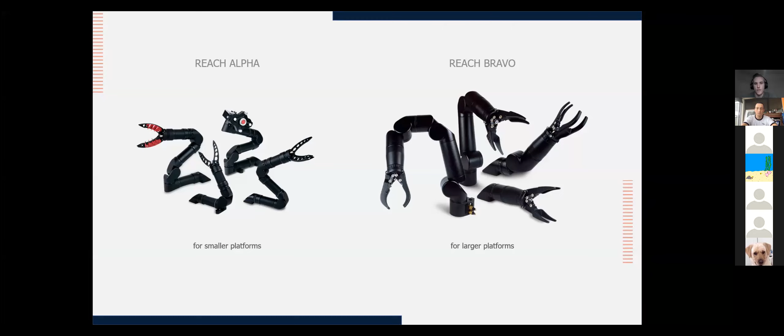This has been achieved through 2 lines of subsea manipulators: Reach Alpha, a small inspection class manipulator, and Reach Bravo, a larger light intervention class manipulator.

In 2017, Blueprint Lab released our first grabber for underwater environments. This was a dual function manipulator, the smallest in its class at the time. In 2018, the 5-function Alpha line was released, aiming to provide greater dexterity through more degrees of freedom. And to aid controlling all 5 joints simultaneously, the master arm was a natural development in the following year.

After the success of the Alpha line and requests from many stakeholders, the larger and stronger Bravo line was released in 2020. The system extended on the Reach Alpha to include extra degrees of freedom and more advanced control methods.

As the Bravo system has become more mature, we have extended towards development of vision and automation systems. These systems are still under development, however we've made some pretty good progress in recent months.

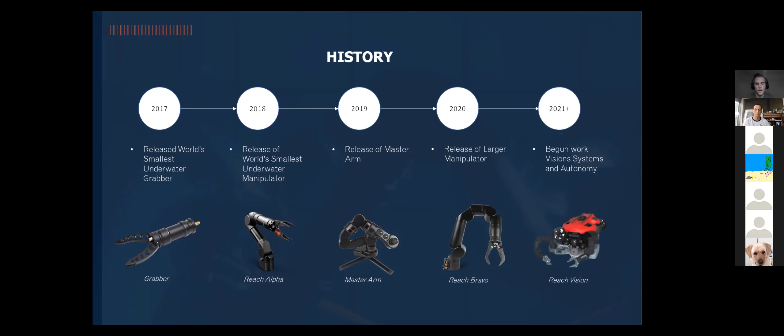To interface with the manipulators and provide feedback to the users, we also develop our own topside software and one-to-one controller. The master arm is a traditional style controller for subsea inspection and intervention tasks, and it allows the user to intuitively control the manipulator with relatively low threshold for entry.

Reach Control is our in-house topside software, and it allows users to control, configure, and communicate with the manipulators. Reach Control also enables users to view the current state of the manipulator, which could be operating at 450 meters underwater. It achieves this through feedback of the manipulator's position, velocity, current, torque outputs, along with the climate and error state of the arm.

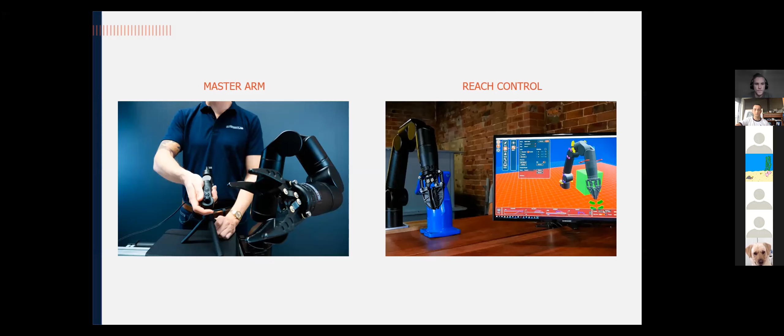Each of these components is critical to the function of the system, and if any one component is not up to scratch, then it could have a detrimental impact on the system's performance. In the worst case, it could even cause damage to expensive infrastructure or cause harm. Because of this, verification is probably one of the most important and time-consuming points, although it requires a lot of detail, so I won't labor you with that.

I am going to dive into a few other topics though. I think joint control is probably one of the first topics that any mechatronics engineer would look into when deciding to develop a manipulator.

Proportional integral controllers form the basis for much of our motor control architecture. We use a cascaded structure where each loop generates the set point for the subsequent loop. From a position demand, a velocity demand can be generated, then a current set point is produced, and then a voltage. This voltage demand is mapped to the 3 phases of a brushless DC motor by the field-oriented control algorithm. These signals are then sent to the motor, which drives towards the generated set points.

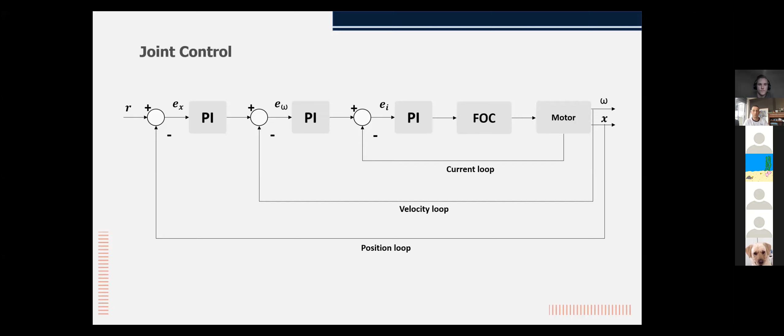As I mentioned in the previous slide, to control brushless DC motors, we need to generate 3 voltage signals. The best way to achieve this is through field-oriented control. This technique uses the Clark and Park transforms to simplify the control problem quite significantly, and it abuses Kirchhoff's current law.

By abusing Kirchhoff's current law, the Clark transformation can be used to project the 3 AC signals onto 2 stationary axes. You can see on the slide that we have the 3 AC signals there, and they are getting transformed into the 2 signals by the Clark transformation.

And then following that, these 2 AC signals are transformed into 2 DC signals, quadrature current and direct current, via the Park transformation.

With this simplified problem, it is now possible to use a basic PI controller to produce the voltage set point. The voltage is then passed through the inverse Clark and inverse Park transformations, and the 3 voltage signals are restored.

Since the quadrature current is directly related to the torque output of the motor, we can set this value via the velocity controller output, as seen on the previous slide. The direct current is then controlled to a value of 0 in regular circumstances.

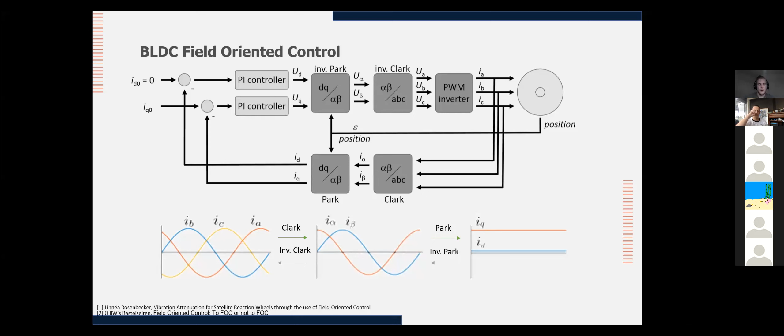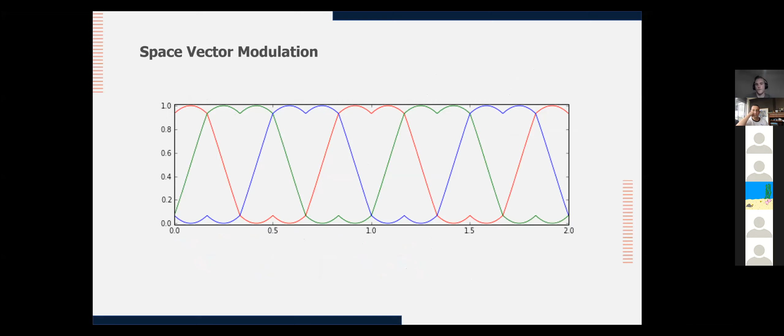Now that we have a way for controlling the joints, we must consider how to calibrate the gains of these controllers. To achieve this, we use the motor model along with the controller and sensor sample frequencies to inform how the gains are computed.

We then define the controller's bandwidth to determine how aggressive the controller will respond to a set point.

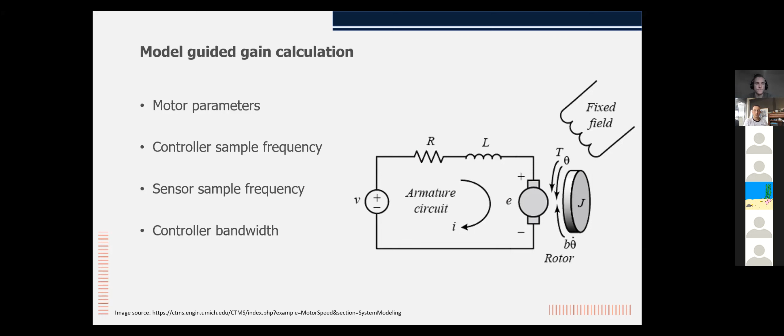Another important concept for manipulator control is kinematics. In this setting, kinematics defines the relationship between individual joints and the global frame. For example, if each joint angle of the manipulator is known and the relationship between each link is well defined, then it is possible to determine where the end effector is with respect to some reference frame.

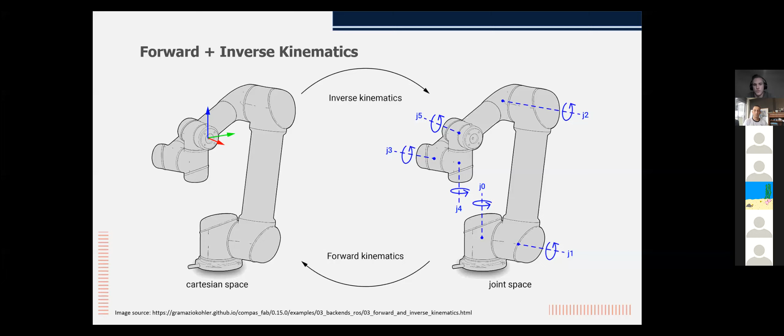It is also possible to do the inverse of this problem, where we determine a set of valid joint angles given some desired end effector position. However, one issue commonly encountered when attempting inverse kinematics is the event that multiple solutions are valid, or that no solutions exist at all. To overcome this issue, optimization-based methods are typically employed to find a solution that is close to the desired set point.

Now that we understand how to move the manipulator's end effector, we might also want to add a degree of autonomy to the process.

In the Bravo system, position presets are implemented to provide the user with stow and deploy positions. Objects are also defined in space to provide keep-out zones for the workspace.

When a user decides to use a preset position, the system will plan a path between its current and desired position.

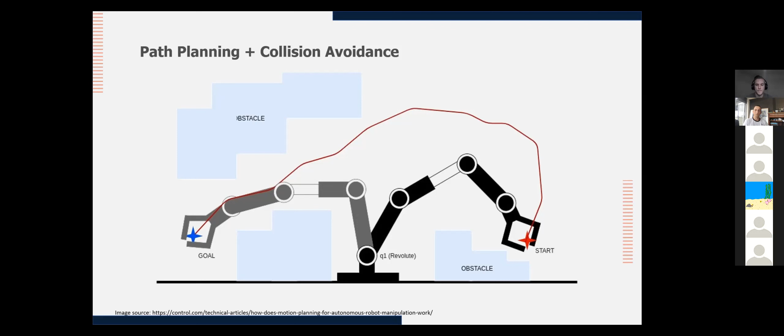So as you can see, there's a lot of moving parts that go into a system like this. I've just shown a small subset of the topics that I've worked on, but really there's a lot more that aren't even shown on the slide.

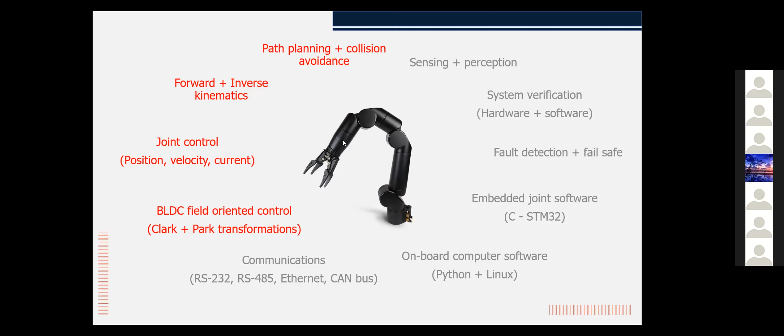So it's a little bit of both, actually. For me personally, I was employed as a software engineer, but I spend a lot of my time working on hardware, doing fault finding for electrical stuff. I do a lot of the control backend for the joints. I also do some of the control backend for the base computer, which provides kinematics, inverse kinematics, and some of those more high-level functions. I haven't done any mechanical sort of stuff yet, but if you're an engineer that has a mechanical background, there's no reason why you couldn't do software and mechanical as opposed to software and electrical.

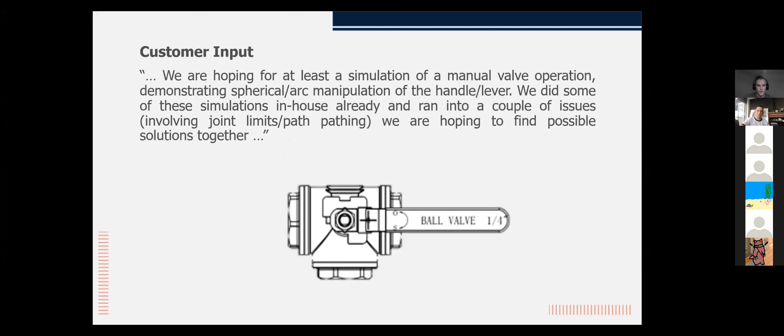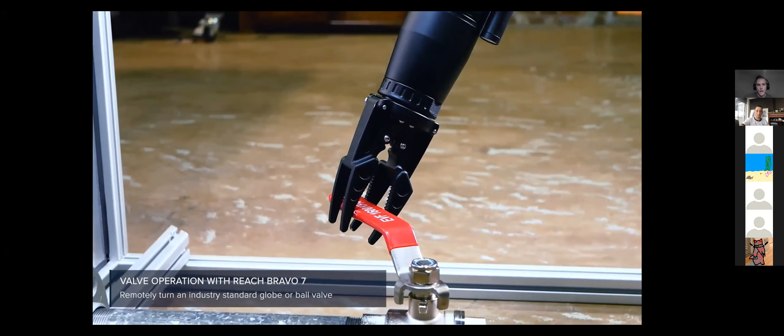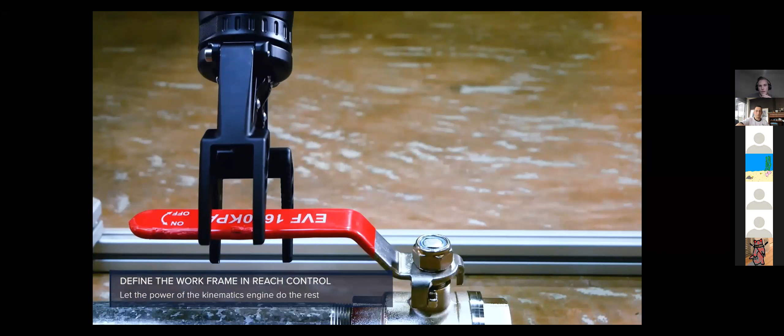Thankfully, it's actually quite easy to use software to remove this complexity. So this is one of the solutions that we came up with. The solution would allow the user to define a fixed point that the end effector would rotate around in space. And then they could simply just supply a velocity demand to rotate about this point and operate the valve.

We named this arbitrary point the work frame and developed a mode to operate around this point. In this mode, the user supplies a velocity demand that is translated from the work frame to the end effector frame. This was achieved by considering the common point between the two frames, the base frame. Homogeneous transformation matrices were constructed to define a relationship between each frame and the base.

From these transformations, a new homogeneous transformation matrix was constructed to map between the work frame and the end frame. Now the angular velocities about the work frame could be mapped to translational and rotational velocities in the end effector frame. Finally, the standard end effector inverse kinematics could then be used to compute the joint angles required to satisfy this demand.

As part of this solution, we also developed some new components for the graphical user interface. These components were developed to communicate to the user via feedback, send control demands to the manipulator, and update the pose of the work frame. For each of these components, we were required to create 3D animated widgets to display feedback and allow the user to modify variables. This process also included utilizing knowledge of the manipulator's kinematics, along with similar transformations to the previous slide.

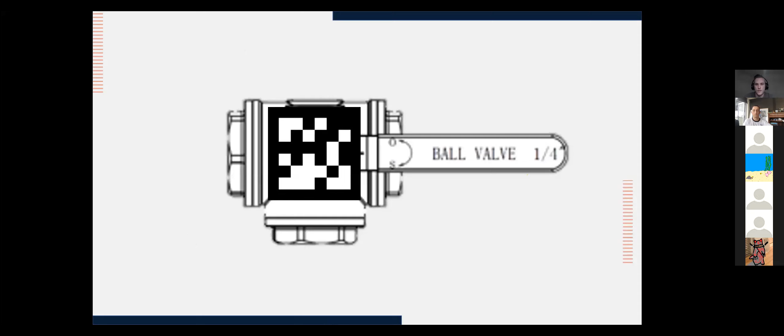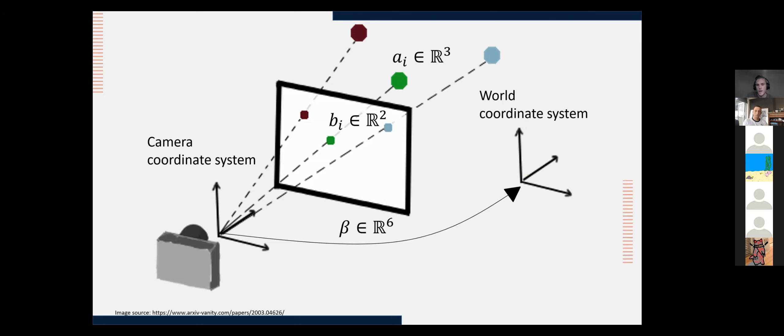This solution also lends itself pretty well to future automation. Consider that an AprilTag is located at a fixed point with respect to the valve handle. This tag could then be used to supply the system with the valve's location. The valve could then be autonomously operated, making the task even more easy to perform. This is possible since the pose of a camera with respect to the tag can be interpreted as a Perspective-n-Point problem. Using a calibrated camera, a set of n 3D points in the world can be mapped to a 2D projection in the image. A transformation between the camera frame and the manipulator base can then be used to determine the target's location.

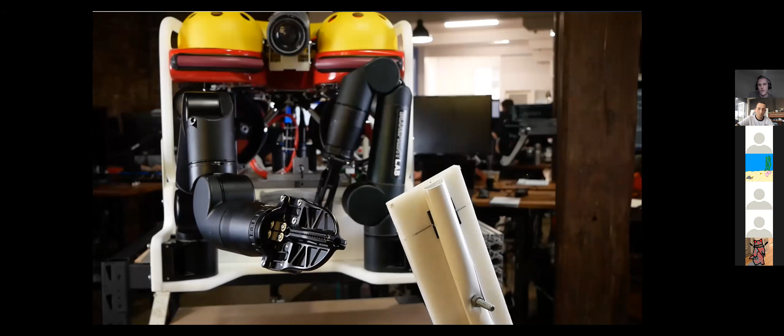Here's an example of tag tracking using this method. This kind of tracking can be easily adapted to many industry problems and is a relatively reliable method for automation.

Does anyone have any more questions on the stuff that I'm talking about here? I have a quick question.

How would you reliably turn the 2D camera array into an actual 3D position in space? Would you have the tag as a known size? Would you know the size of the tag? So two things you need there: a tag with known points, and a camera that is calibrated. With those two things, you can back calculate the distances quite reliably.

I saw in one of the videos before you had a manipulator with 2 cameras on it. Do you think you could synthesize the information from 2 cameras for a more robust solution to get the distance? Yeah, I don't believe we've done this yet, but it's definitely something you could do. It also supplies the system with more robustness to occlusions. For example, that paddle has to be held to the side of the Bravo, to the right side on the screen, because if it's on the other side, occlusions stop it from being able to see the paddle. And that's also why there's 2 tags in that picture, to provide extra redundancy there. That's interesting. Thanks.

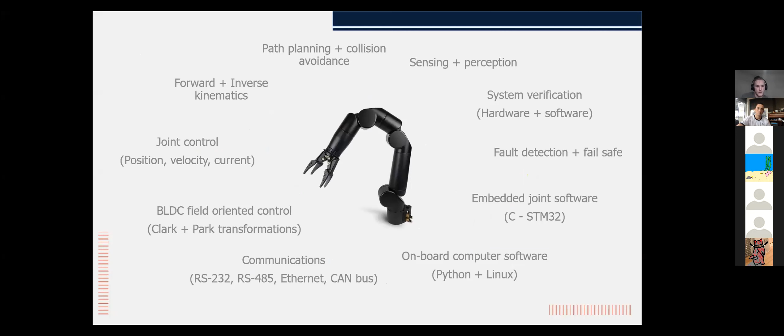Oh sorry, I just said them. But yeah, so we are part of ocean science, offshore energy, naval, emergency services, land forces, nuclear, and we're trying to get into the space industry as well.

An interesting one is emergency services. In Canada, one of our main clients uses the Alpha grabber to recover victims trapped under the ice. Unfortunately people might drive their car into the water, get stuck under the ice, and no one can retrieve them because the water is so cold, so they'll send a grabber in to retrieve the body - which is good for the victim's family in that circumstance, because they get a bit of closure by having the body.